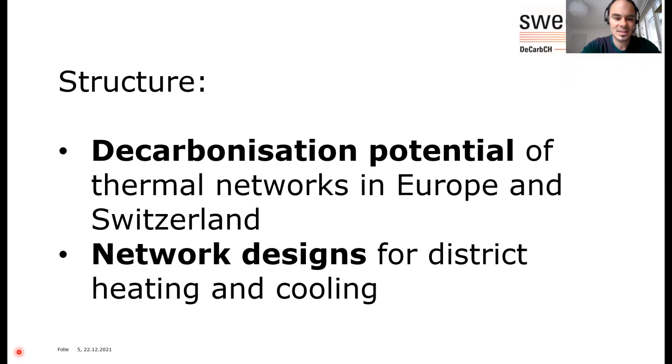The structure of the talk has kind of 2 parts. The first part is going to be about the decarbonization potential of thermal networks in Europe and in Switzerland. The second part is about specific new network designs for district heating and cooling networks.

I would like to start with this quote: heating and cooling are using almost 50% of final energy demand and are responsible for approximately 36% of CO2 emissions in the EU. That's a statement of the European Commission, and it highlights the importance of heating and cooling regarding CO2 emissions.

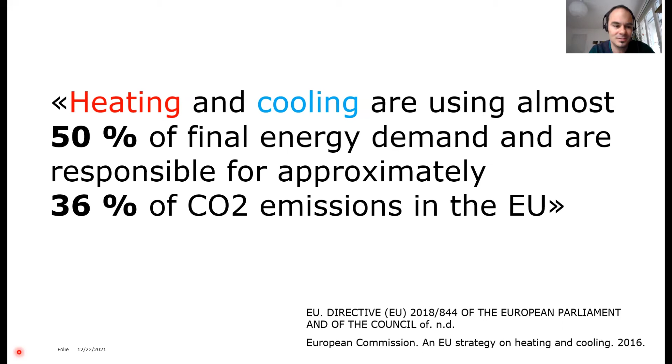I would like to look at Switzerland now and the decarbonization potential of thermal networks in Switzerland. That's a very rough estimate, but for me it was important to get the order of magnitude that thermal networks play in decarbonizing Switzerland.

The total emissions in Switzerland are 46 megatons at the moment. And the building sector produces 24% of this, that's about 11 megatons, mainly caused by fossil heating.

Now, we want to bring these 11 megatons to zero by 2050. And the first step that has to be undertaken is insulation and refurbishment of the buildings so that the final energy demand for heating is reduced.

The potential here is roughly about 30%. The different reports kind of deviate, but let's say we end up with 7.5 megatons there.

And then the district heating, the thermal networks, come into play. They might be able to reduce the CO2 emissions further down to 5 megatons, by about another 30%. And then the remaining emissions should be reduced by individual solutions, not thermal networks, just because the buildings might be too distant from each other, so that thermal networks are not feasible.

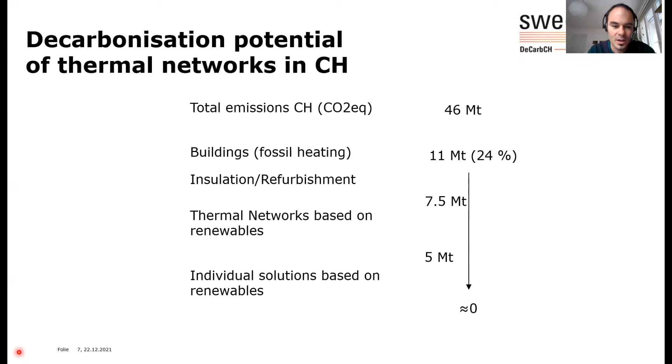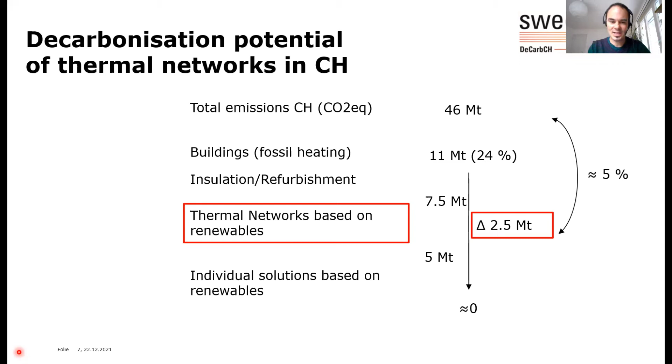Using this very rough estimate, we see that thermal networks can reduce emissions by about 2.5 megatons. And if we relate this to the total emissions of 46 megatons, we end up with about 5%. So this is the order of magnitude, 5% decarbonization potential of thermal networks.

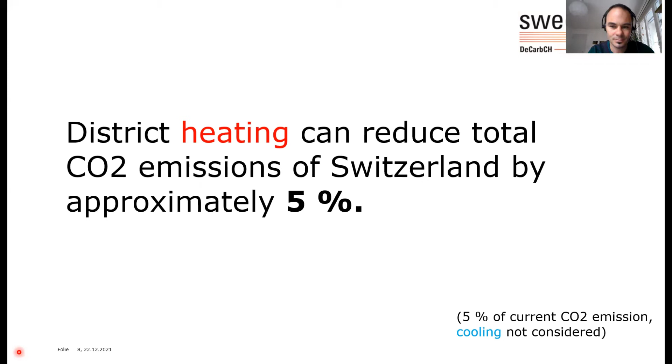Now I would like to put Switzerland into a European context regarding the share of district heating on the final heating energy demand and the share of renewables within district heating.

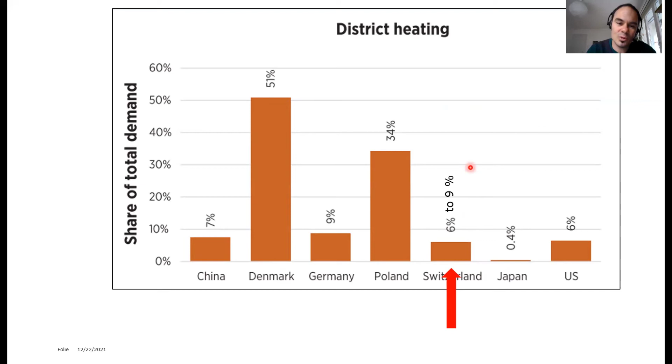This is the share of district heating on the total demand for a few countries: China, Denmark, Germany, Poland, Switzerland, Japan, and the US. For Switzerland, the share is given in this report to be about 6%. Even this older report from 2014, nowadays 6% is sometimes cited. But according to Fernwärme Schweiz, it's more something like 9% at the moment.

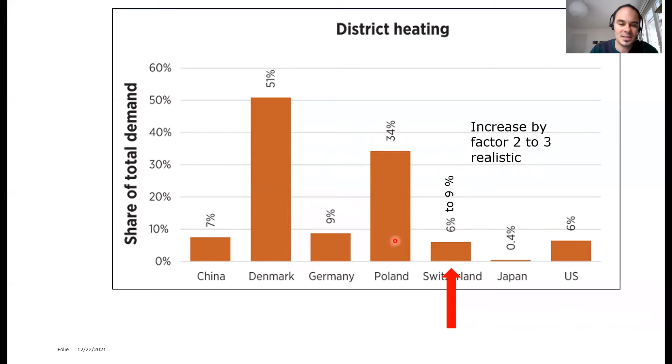District heating should increase in the future, and there are reports saying that an increase by a factor 2 to 3 is realistic. So we are going upwards here. But that's kind of the comparison to other countries. We have Denmark at the forefront with 51%. We have Poland with a large fraction, but we'll see that, for example, Poland has a small share of renewables in district heating. That's the next slide.

In Switzerland, waste heat from waste incineration is considered carbon neutral. So if you do this, you reach much larger fractions of renewables. But in this report, they just did it this way. So you have to be careful when you quantify the share of renewables in district heating.

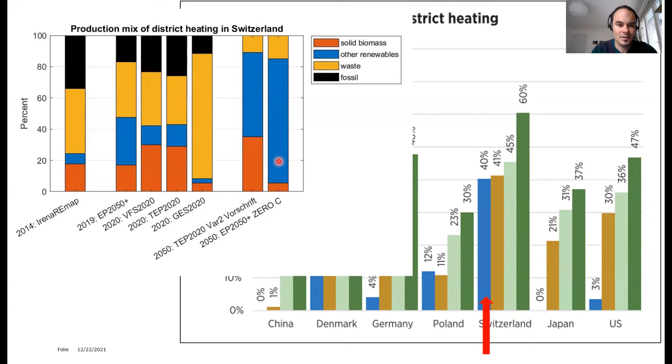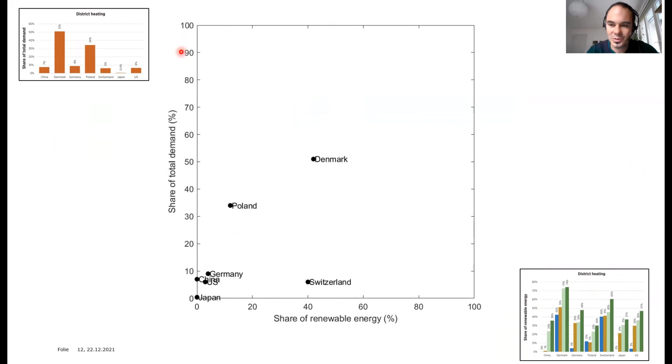So for the international comparison, I'll stick to the 40% for the moment. What I did then was plot the share of renewables on one axis and the share on total demand on the y-axis, just to see where Switzerland is placed roughly in a European context. The best would be to be here in the top right corner.

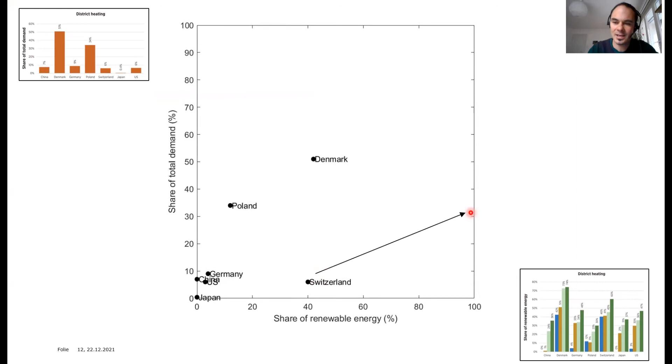Denmark, again, is at the forefront, but considering share of renewables, Switzerland is also performing quite well. Of course, we want to move that way, toward a share of, if possible, 100% renewables in district heating, and increase the share of total heating demand as well.

So we need to build more networks, obviously. And this is only possible, I think, if we reduce the network temperature, because lots of environmental heat and waste heat is available at lower temperatures. Therefore we have to reduce the network temperature so we can actually make use of these low temperature available heat sources.

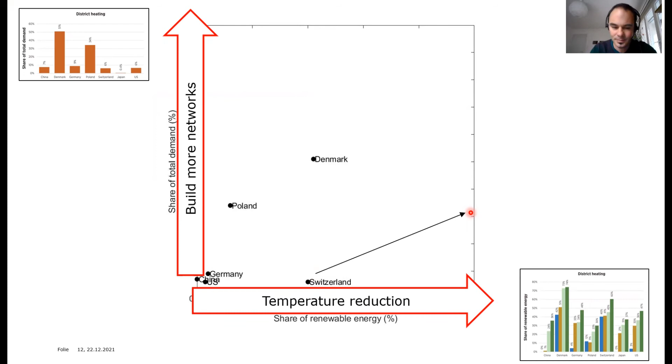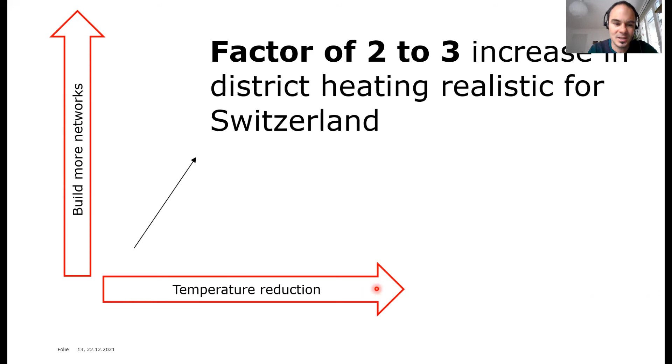For this section, I'd like to remember that a factor of 2 to 3 increase in district heating is realistic for Switzerland. More networks, of course, but also the temperature reduction aspect is sometimes forgotten and I think is quite important. This factor of 2 to 3 increase is a big motivation for myself to be active in the field of thermal networks, also within the DeCarbCH program in work package 3: technologies, design and operation of thermal grids for future energy planning.

From now on I'd like to move a bit more to the technological part. Before doing this, I'd like to show this slide. I copied it from a presentation by Patrik Rust from EWL. He showed this at the Energieapero in Lucerne a couple of weeks ago, saying we are coming from a solar era, moving to a solar or renewable era, and at the moment we are in this fossil peak time interval that we will overcome in the future, moving again to renewables. I kind of like the positive attitude of this picture, so I thought I'd show it here.

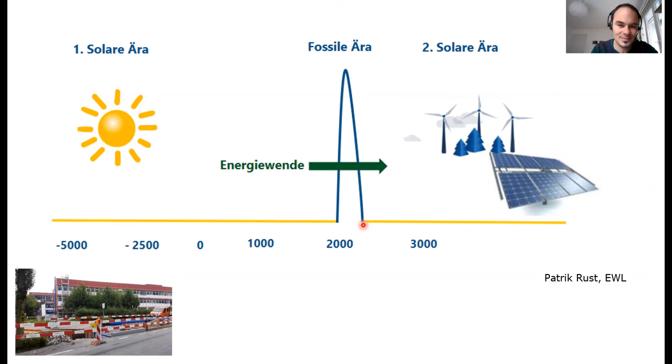I'd like to focus now for the rest of the talk on this fifth generation, as the authors call it, which has certain characteristics. First, the sources, the plants that can be used, can be very diverse: small inputs from solar thermal, geothermal, lake and river water, data centers that can put heat into the system. But you also have agents in the system that work both ways - buildings need space heating in winter, but can supply heat to the network due to their cooling demand. So it's a more complex situation.

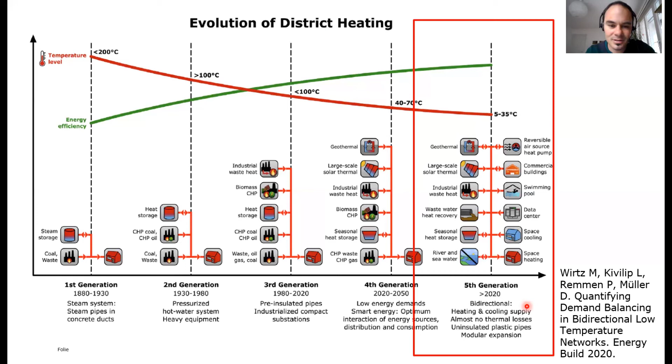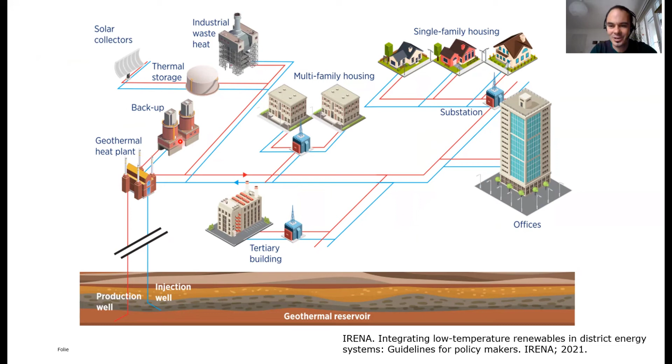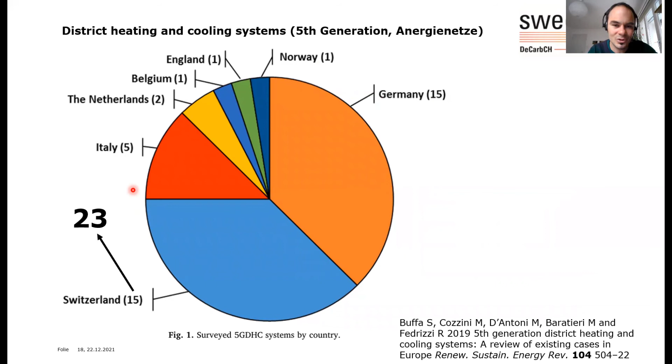Actually, counting the Anergienetze in Switzerland at the moment, it's not 15, it's 23 at the moment.

Now I'm getting into network designs. So we saw these networks, they are kind of complex. There's heating and cooling supply by various agents. How do you design such a network? Let's just assume for simplicity, we have 3 prosumers. 2 mainly have cooling demand and 1 has heating demand.

These figures are motivated by a study that we did together with the University of Melbourne. So the cooling demand is actually higher than the heating demand there. But well, it also applies for the Swiss. The principles, they also apply for the Swiss situation.

Okay, let's say there is a plant and 2 storages. So how do we connect them to the network? In the bidirectional network, there is a cold pipe and there is a warm pipe. Both of them are actually quite cold. So one could be maybe at 8 degrees, the other at 12 degrees. So both really cold with a temperature difference of 4 to 6 Kelvin, something like this. But one is warmer than the other.

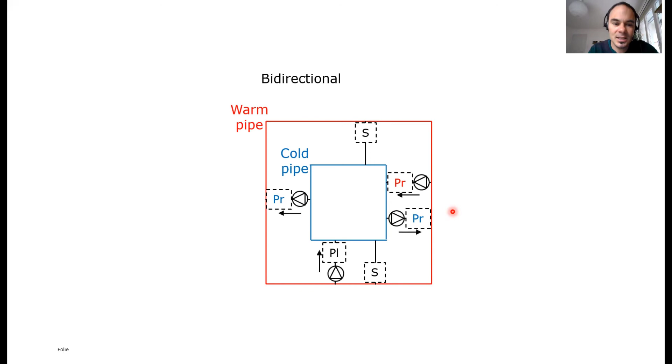And the agents, they are connected in parallel to the network. And each agent has their own circulation pump. So for example, this prosumer here, he has heating demand. So he takes water from the warm pipe, extracts heat and injects it to the cold pipe. Of course, he needs a heat pump to actually reach the temperature levels needed for space heating, domestic hot water.

But the flow direction is from the right to the left here. Then we have a prosumer with cooling demand. He does it the other way round. He takes the cold water and injects it into the warm pipe. If the network temperature is low enough, that can be done directly using a heat exchanger only. If the network temperature is higher, a chiller might be needed.

And now the interesting feature here is that the flow direction through the prosumers, it can be both ways. So also the flow direction across the storage can be both ways. And this has to be hydraulically solved typically. So if you use pumps like in the image here, they have to be controlled so that they can actually push the water both ways through the storage. And the goal is to keep the water flow through the bypass 0. But since control is never perfect, with pumps in each agent, there is usually some residual flow, and therefore we actually need the bypass. So it's kind of a complex hydraulic setting.

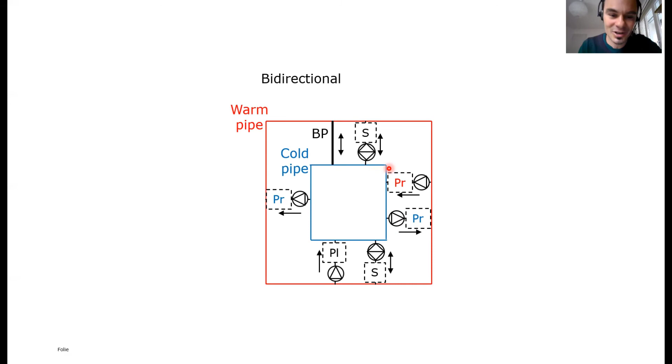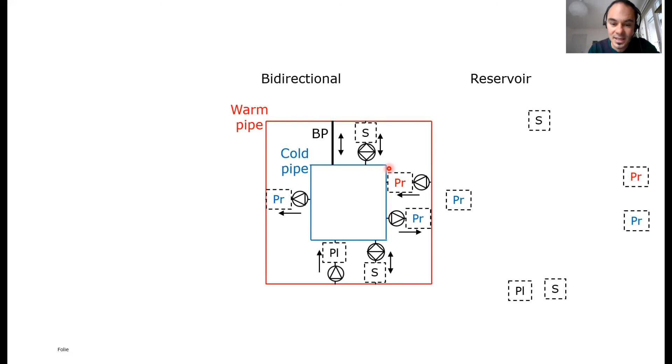Before I discuss this, I would like to move on. Another idea is the reservoir network. In this network, there is a single pipe, the reservoir loop, and there is a pump that actually circulates the water through the reservoir loop. And then there are agents. They are now connected in series to the reservoir loop. And again, each agent has their own circulation pump.

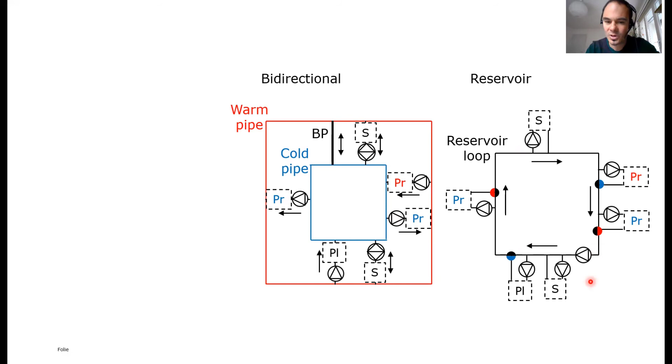This is hydraulically very simple, but what you have to be aware of is that each agent injects water of different temperatures into this loop. So you have to control the temperatures. Kind of shifts the problem from the hydraulic side to the thermal side. But yeah, it's another option.

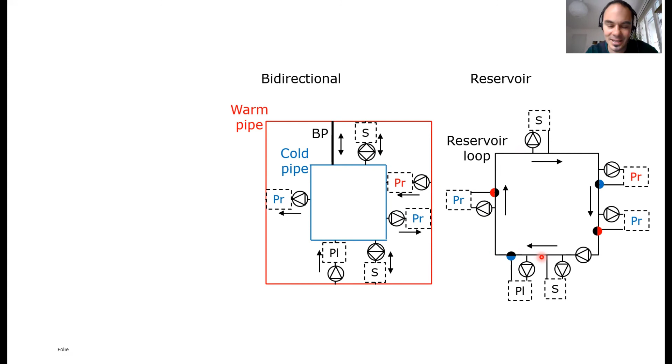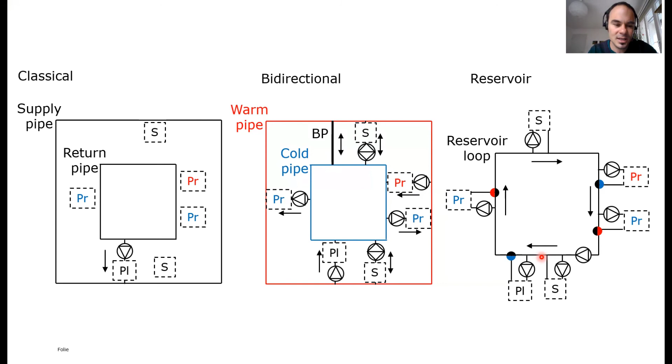And then, of course, there is the classical network. It's drawn in maybe a bit of a shape that's not that many of you might be used to, but there is a plant, and the plant defines the volume flow, the mass flow in the network. There is a supply pipe, and there is a return pipe, and the agents are connected in parallel to these 2 pipes, and the mass flow is controlled by valves. That's basically the classical setting. Again, if you now have prosumers with heating and cooling demand, there is mixing occurring in the return pipe, which decreases the network efficiency a little.

Right, so there are 3 design principles that are published at the moment that are known. In Switzerland, for example, ETH Hönggerberg, Suurstoffi Areal, FGZ in Zurich, they operate in the bidirectional way.

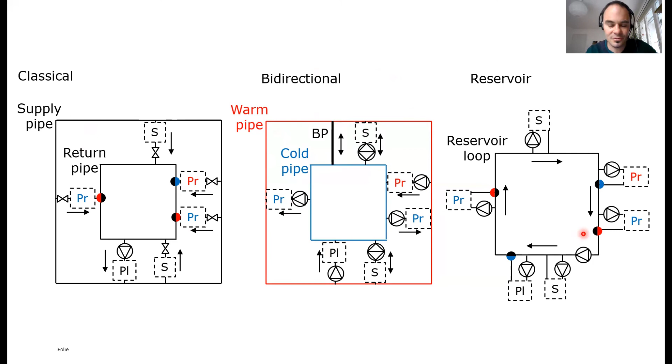Many lake water networks use the classical setting, and the reservoir network that has not been realized yet. Here at Hochschule Luzern, we study the three systems in different ways.

We have a lab here. On the left, the nodes lab, there we can actually run a little district heating and cooling network in the classical and in the bidirectional way, and do experiments, develop hardware for these systems.

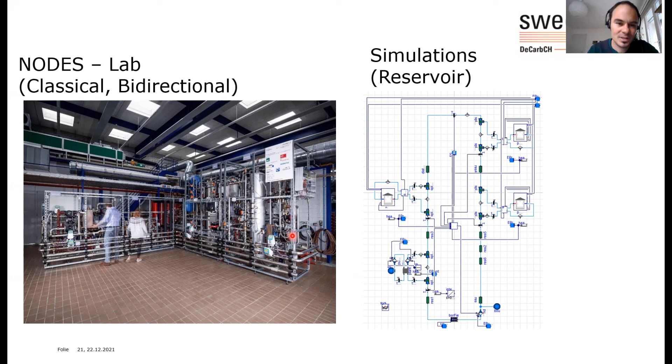For the reservoir type, we use simulations. And in the last 5 years, we have published a number of articles comparing the different network designs. And if you're interested, you can look them up here.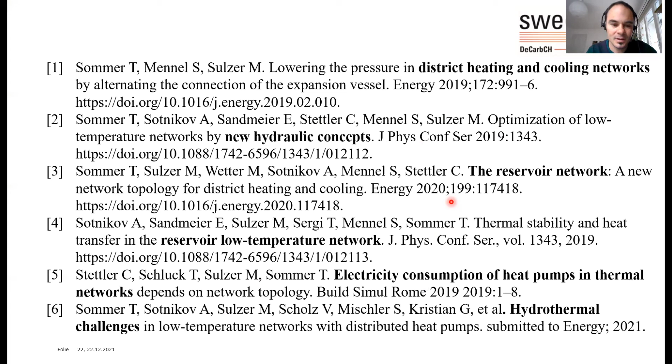I would like to just very, very briefly summarize advantages and disadvantages of the different network types very briefly. As I said before, the bidirectional one is thermally the most efficient one.

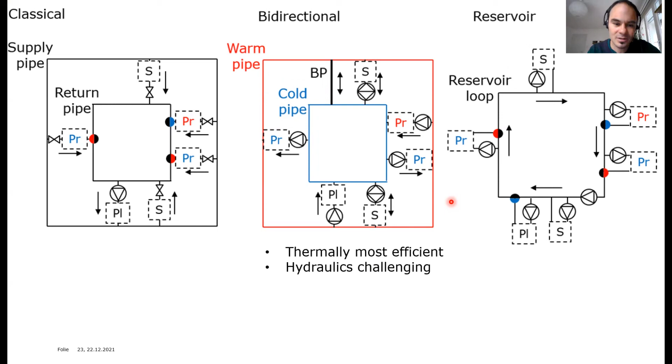The heat pumps and also the circulation pumps, they actually operate most efficiently in this network simply because the warm and the cold water are separated. There's no mixing of warm and cold water occurring. However, the hydraulics are challenging due to the various pumps in the systems that operate in different directions.

Then there is the reservoir network. This was actually developed based on, or resulted from the bidirectional network, thinking that we want to overcome the hydraulic challenges here. So the hydraulics of this reservoir network are really simple.

The individual agents are hydraulically decoupled. For them, it feels as if they would take water from a reservoir, a lake or something, and put it back into the reservoir. That's where the name actually comes from.

However, the temperatures might be challenging. And one important or interesting feature is that in this network, you only need one pipe, whereas in the other two network designs you need two pipes, at least when you have a circular network arrangement. So this can actually cause savings using only one pipe. It has to be a slightly larger diameter, but in the end, there are savings.

And then there is the classical network type. That's, as I said before, mainly used for lake water networks. One reason is that for lake water networks, you don't need storage because the lake itself is an ideal plant and storage at the same time. So that reduces the complexity of the network a little.

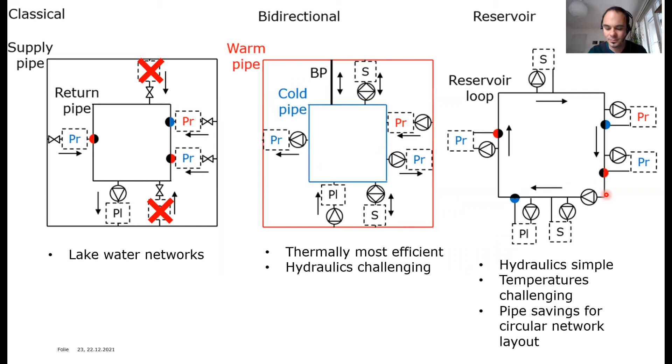All right, summarizing the talk, I think it was important to get an idea of the decarbonization potential of thermal networks in Switzerland. Order of magnitude estimate: 5%.

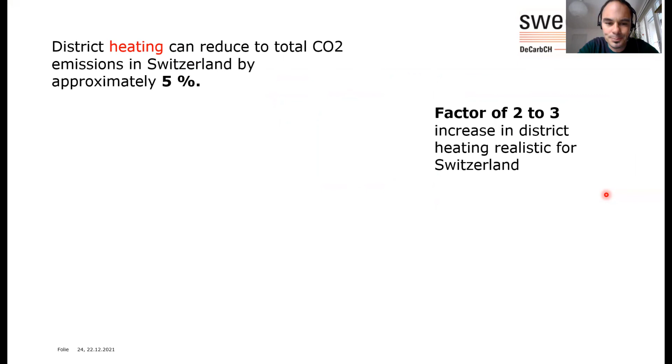Then in the future, district heating is expected to increase by a factor of 2 to 3. Some reports even state 4 or slightly larger than 4, but most reports say a factor of 2 to 3 is realistic and is needed to become CO2 neutral by 2050.

And it's important that this goes along with a temperature reduction. If we build more networks, we need plants for these networks, and they are often available at low temperatures, so the network temperature should be reduced in the future. And then in the end, I showed 3 different network types with advantages and disadvantages.

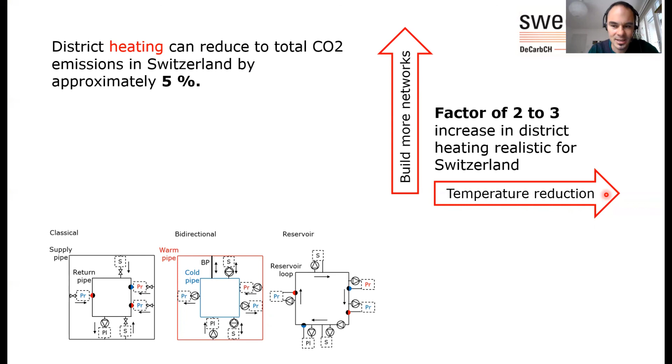And network types that are used for these really low temperature networks, Anergienetze, that can provide heating and cooling at the same time.